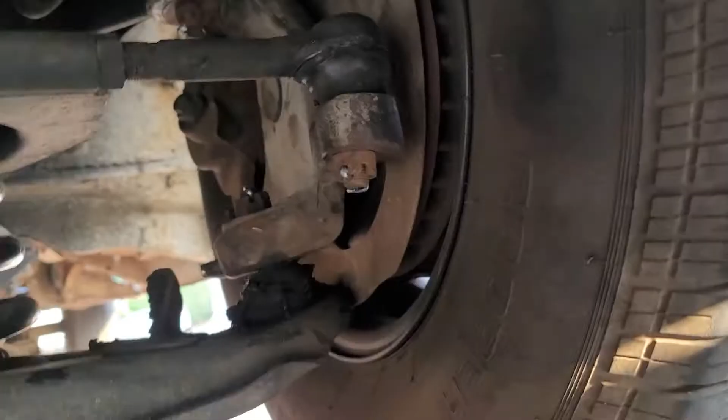So when I bought the truck, it was lowered, and I really wanted standard or stock height. I changed the springs, or had the springs changed, but you can see here we got a drop spindle, and I wanted to replace that with a stock height spindle.

Well, admitting to my mistake, I just bought a spindle for a 65 Chevy C10, and lo and behold, the ball joints didn't fit. So it couldn't be done. I went back and researched what the heck we got here, and I came to find out that it's very common, when putting on disc brakes, to also change the ball joints to newer ones.

There's two options: either 71-72 year ball joints and spindle, or 73 through 87. So what do I have? I bought the cheapest parts I could find, just one of each.

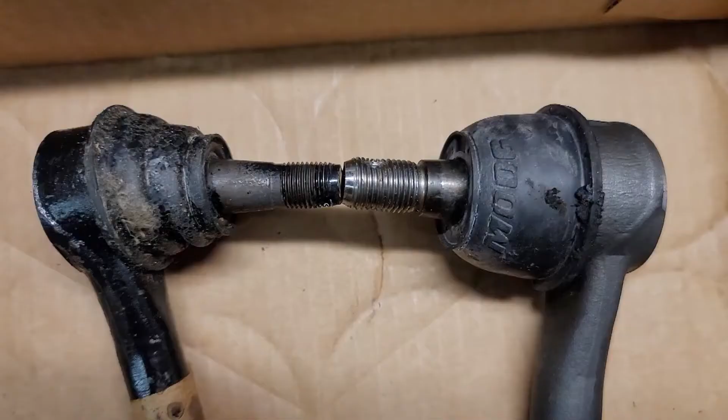By comparing the outer tie rod, I was able to determine that this spindle is actually for the 73-87. You can see the thread size on the left, which is the 71-72 outer tie rod, is smaller than the threads on the 73-87 tie rod end. That's how I was able to determine the spindle must be 73 through 87.

The bottom ball joint does not change from 71 all the way through 87. Now the interesting thing is, if you look at the ball joint on top, it's not a good fit. The cotter pin hole is below the slots in the castle nut. So it turns out that ball joint is for 71 through 72.

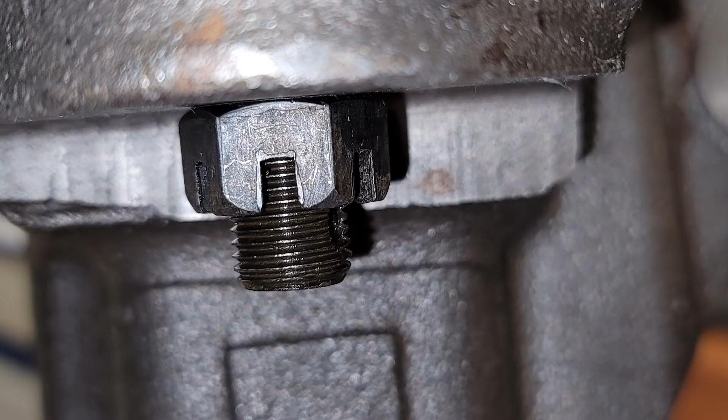So here's the new 73-87 stock height spindle I want to use. With the 71-72 ball joint, it looks exactly like the one on the car, where the cotter pin hole is below the slots in the castle nut. With the 73-87 ball joint, the cotter pin hole lines up perfectly with the slot in the castle nut, which you'd expect, since this is a 73-87 spindle.

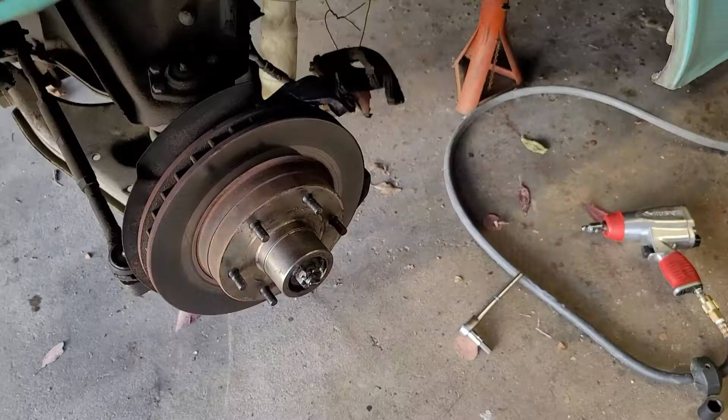We started on the driver's side. We jacked up the car and got it on a jack stand, safe. We got the other side on a jack stand too, getting ready. Wheel is off. We took the disc brakes off and got them hanging from the frame with tie wire so we don't stretch the brake hose. Next we'll take the rotor off.

We got the rotor and the dust cover off. To loosen the outer tie rod end, I tried something a little different: I put the castle nut on backwards to protect the threads at the bottom, then just banged away with my mini sledge, and eventually it broke loose. And there it is, free.

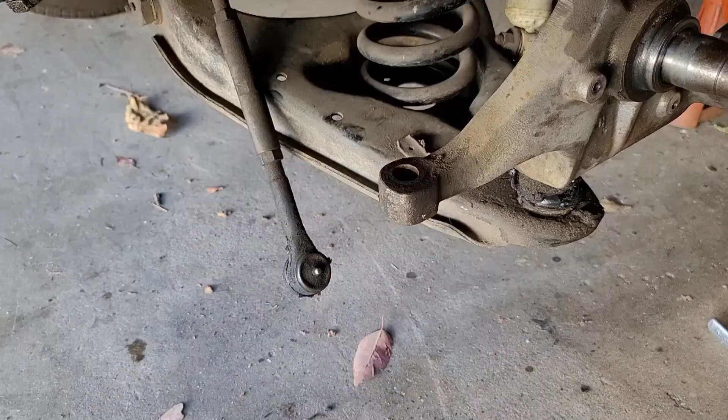We had to loosen up the ball joints to remove the spindle, and I don't mind telling you it was a bit of a struggle — took a big hammer to pop those puppies loose. We did support the bottom control arm while doing that, so the spring wouldn't just let go. Since then, we've let it hang, slowly lowering it with a hydraulic jack.

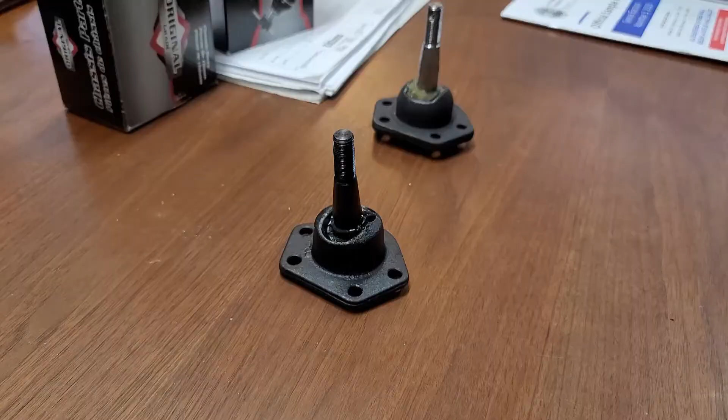So I was hoping to use the new 73 through 87 ball joint and have everything there 73 through 87. But what I found when I compared the two is the cage that holds the ball joint for the 71 to 72 is a little smaller than the 73 to 87 ball joint.

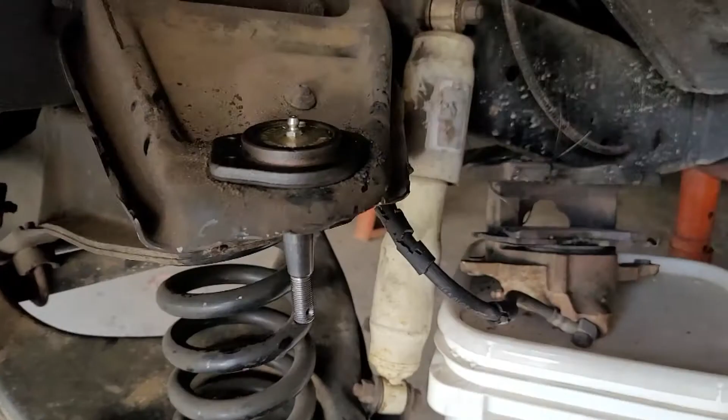So I wasn't sure that I'd be able to fit the 73 to 87 ball joint in the control arm because I was afraid the hole that this cage slips through might not be big enough. Well, it turns out the hole is big enough to accommodate the ball joint for 73 to 87, so we're going to have the right ball joint in there.

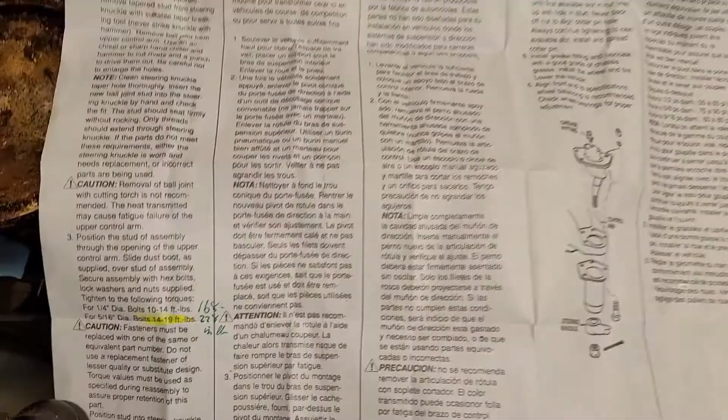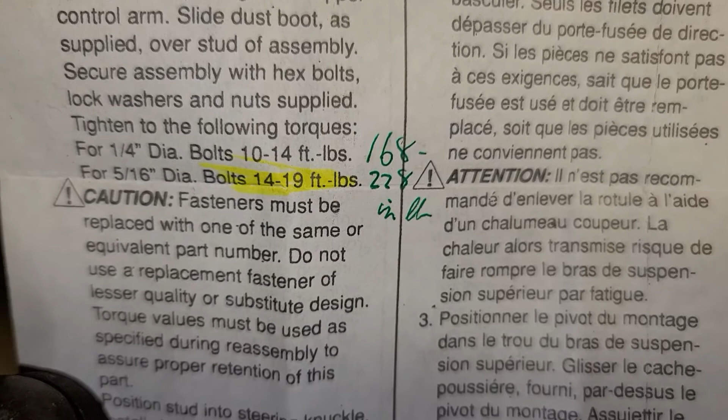All right, so our little bolts, 4 bolts that held on the upper ball joints, 14 to 19 foot-pounds, which is kind of low, and my little torque wrench for that lower range is in inch-pounds, so it's 168 to 228 inch-pounds.

All right, so we have the new spindle in place, resting on the lower ball joint and lower control arm. The upper is just starting in a hole, but in order to get the threads to poke through, we'll jack up the lower control arm until we can get some threads to start the nut.

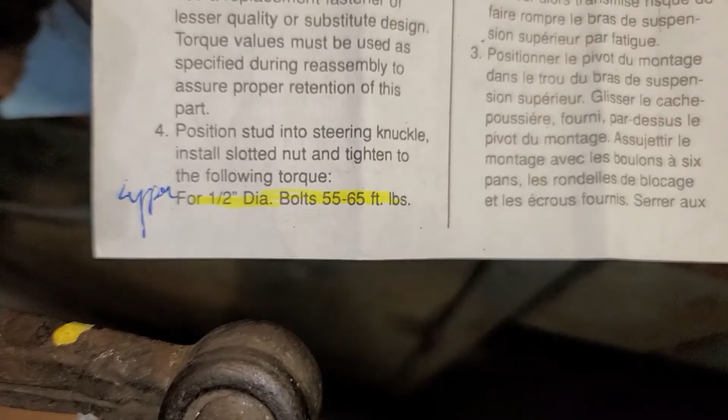Okay, so we got a new dust cover on the lower ball joint, the new 73 to 87 ball joint on top. The upper ball joint has a 1/2 inch diameter thread, so we'll use a torque wrench to go up to 55 foot-pounds and then continue on to get the cotter pin hole lined up.

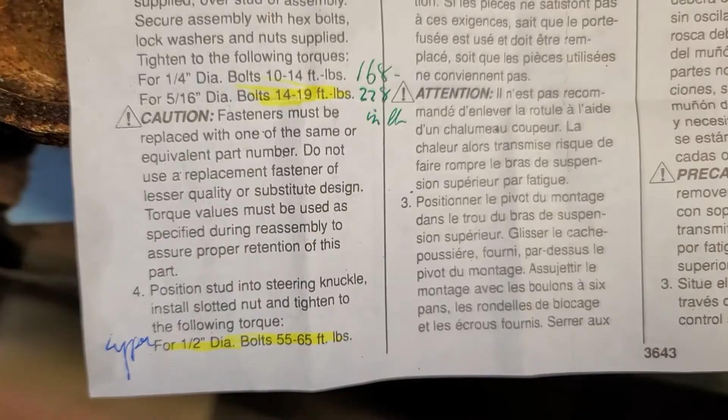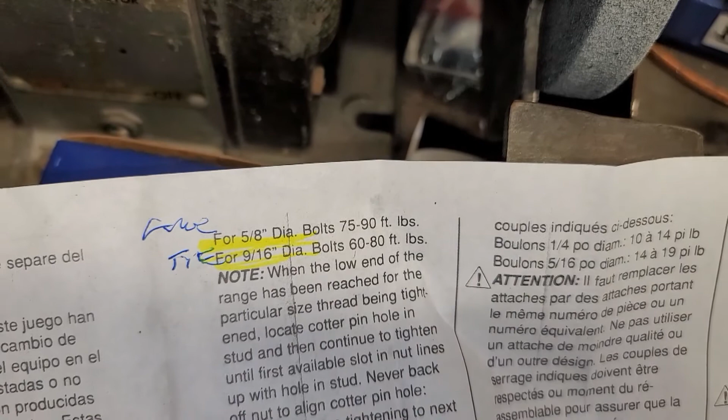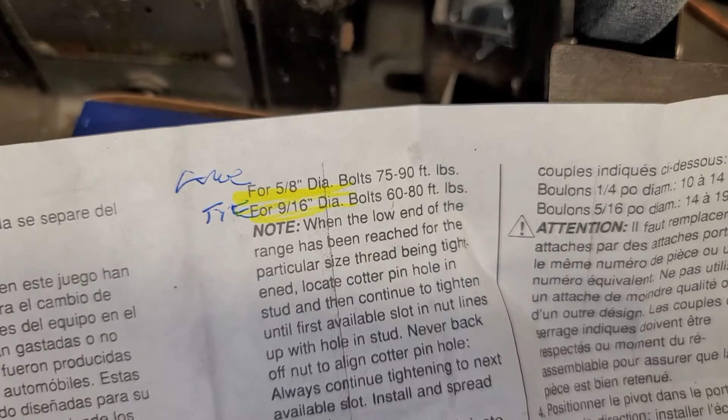The lower ball joint has 5/8 inch diameter threads, and so we'll go to 75 foot-pounds, and again just continue on to line up the cotter pin hole. The outer tie rods are 9/16, so we'll go to 60 foot-pounds, and then continue on to line up the cotter pin.

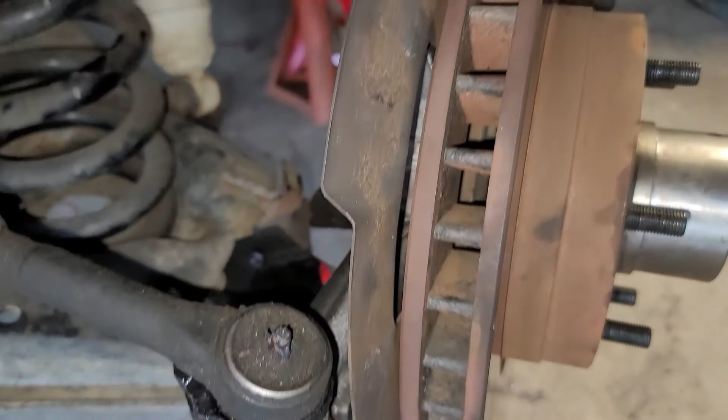Okay, you can see we've got the rotors back on. We repacked inner and outer wheel bearings. We put the disc brakes back on, the calipers. We lubed the tie rod ends, the lower ball joint and the upper ball joint. I really need it for the upper because that's brand new. It comes with a little bit of grease, but you definitely want to get some more lube in there.

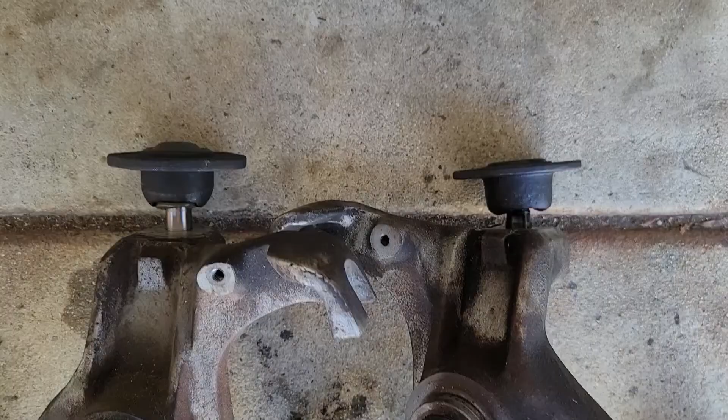Okay, here you can see the difference between what was in there before, the 71 to 72 ball joint on the right, and the 73 to 87 ball joint, which fits the spindle more appropriately, on the left.

One thing you can see is that the distance between the top of the spindle and the control arm, basically the bottom of that ball joint flange, is quite a bit different between the two, and that changed the geometry enough that my toe-in after the installation was about 10 to 15 degrees. It was undrivable, so we had to make a basically rough adjustment or alignment here in the garage just to be able to drive it to the alignment shop.

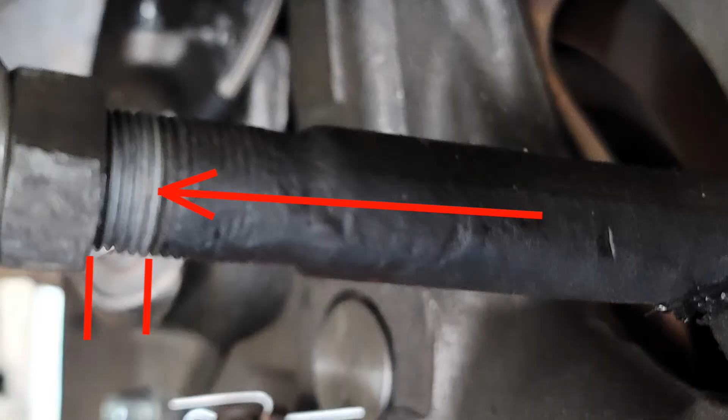So here you can see the amount of adjustment that we had to make just to get the tires near zero toe-in. Keep in mind you got the same adjustment on the inner and the outer and on both sides, so the total distance that was moved is 4 times what you see here.

So in the end, the project was a success. We got the truck back up to stock height and everything is working well, and it's very drivable. We are getting a professional alignment as soon as possible, and the appointment is set up.